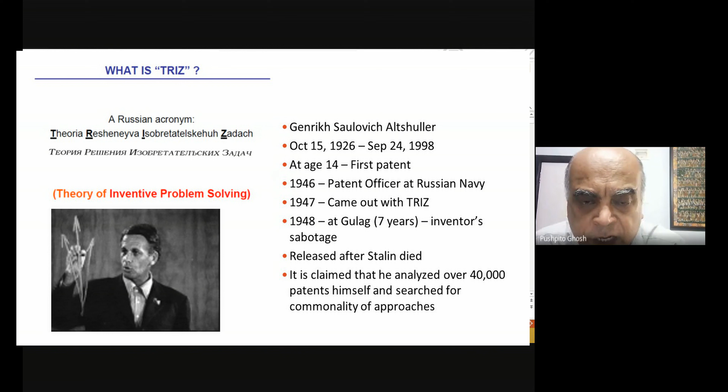I thought let me take a break and tell you a little bit about one of the methodologies which is being looked at as a way of facilitating innovation. This is the person, Genrikh Altshuller, who came up with this method known as the theory of inventive problem solving. He used to work in the Russian Navy as a patent officer. He felt that innovation is something that can be learned, and he came up with a structured methodology, which is what I'll tell you about today.

He apparently studied a very large number of patents, anywhere between 40,000 and 200,000 depending on whom you're referring to. Interestingly, many of these patents that he read, and this whole theory that he developed, came while he was in jail. He was actually put in jail by Stalin, and only after Stalin was no more was he released from prison. Very, very intelligent person.

What he did, of course, was read patents, this large number, and he was trying to find out if there are some recurring themes in how people were trying to solve whatever problem it is in the patent. He said yes, it always falls into some kind of themes, so he picked out those themes. Then he said, if people can be trained to pick out such themes and find out how one might get a suitable solution, that would be wonderful. So that's what it is.

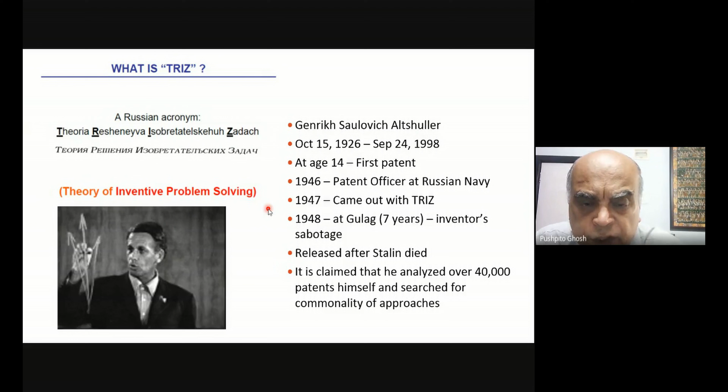So this is his most important principle. One is, as I said, why was he looking at patents? He said whatever you try to do, you'll find someone somewhere has already solved your problem, or one similar to it. What he said is creativity means finding that solution and adapting it to the current problem. Obviously you cannot use that solution exactly in toto, because it may be a different problem, but there's a huge amount one can learn. That's what he means by a problem similar to that.

Then he said, if you can learn and just adapt it to your particular situation, that might be the fastest way to solve the problem rather than thinking all the way from scratch. It may not be necessary. This is something I would encourage all of you to do - there is a lot out there, you just have to be smart enough to pick it up.

And then what he said is that most of these things he found have something to do with contradictions. What he said is, don't accept contradictions, resolve them. Let me tell you that over the years, when I was looking at contradictions in our own work, some of those things actually spurred invention.

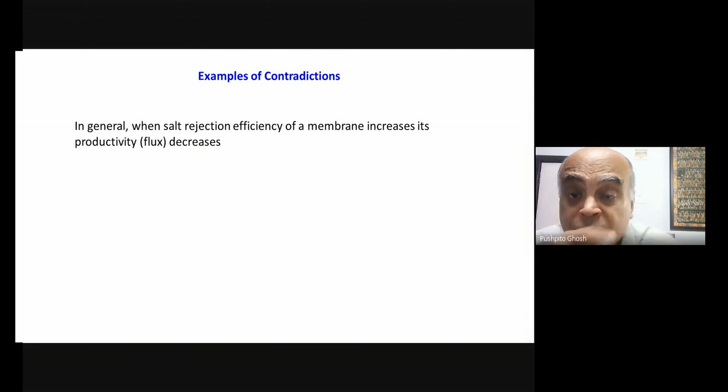Our institute was quite big in the area of reverse osmosis. As I'm doing reverse osmosis, I obviously want to reject as much of the salts as possible so that the water I get is as pure as possible. The second is, for a given pressure, I want to maximize the output in terms of the flux. Generally it was believed that if you try to increase the salt rejection efficiency, it would mean you compromise on the productivity of the flux, which you don't want. You really want the best of both.

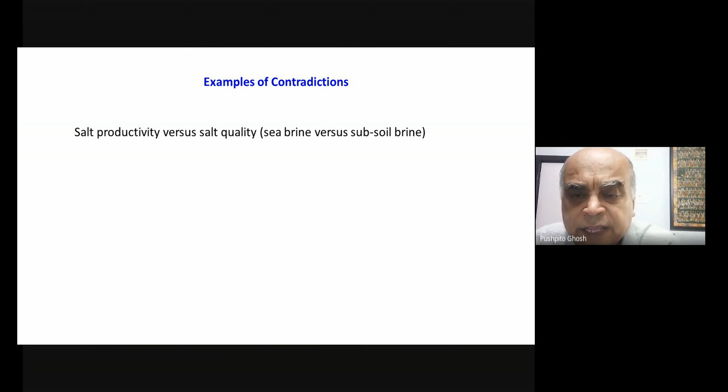Take another case. I remember this used to be a burning issue around 99, 2000. Most salt is produced from seawater, but there were also underground brines in many areas from which you could produce salt with very high productivity, because those brines were much more concentrated than seawater, maybe 3 to 4 times as concentrated in some cases. Obviously people wanted to use those to produce salt, because in less area I can make more salt. But the problem was that it would give higher productivity of salt, but the salt would be of poorer quality.

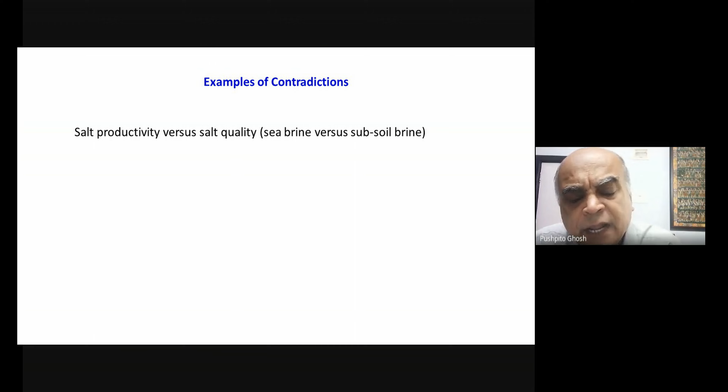The belief was that because the composition of those brines is different from that of seawater, and that is the reason. Okay. Or if someone says, I wanted extremely pure salt, and there is no other way to do it than, let's say, by recrystallization. You can say, let us just use solar energy, dissolve the salt again in seawater, and then allow it to evaporate out in the open pan.

And honestly, you can get extremely pure salt through that kind of recrystallization, but it increases the land requirement. So you may require about 10 to 15% more land. And so that was again a major issue. Where will this land come from? So obviously, how do I resolve this contradiction that I can still make use of solar energy, do recrystallization out in the open in the fields, but at the same time not increase the land area?

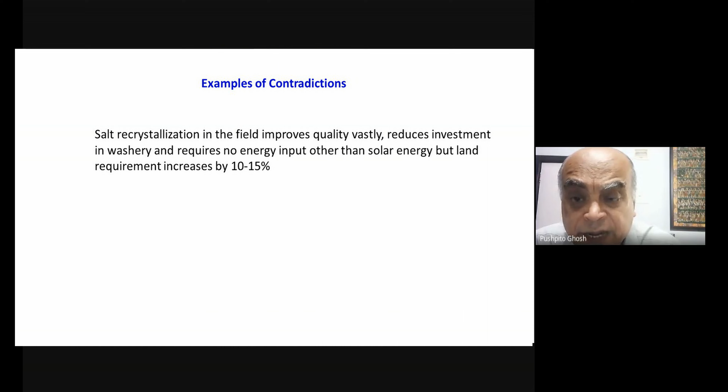Or let's say there is a membrane, the ultrafiltration membranes, which are excellent for rejecting pathogens. So if your water is contaminated, let's say with coliform, you might be able to pass it through these ultrafiltration membranes, and you might be able to make germ-free water. Now, actually, the people who require it the most are, let's say, people in villages, because many times they just pick up water from the ponds. Those waters have got a lot of pathogens in them.

But the problem is that these ultrafiltration units, they require adequate head, because you need some pressure to push the water out of the membranes, because the pores are very small. Now, the problem is that you can, of course, do it with a pump, but these very poor marginal villagers, many times they don't have electricity in their house. They may not, or we may not, be able to afford a pump. Okay, and they all live in just their huts. There's no head, so they can't generate that pressure.

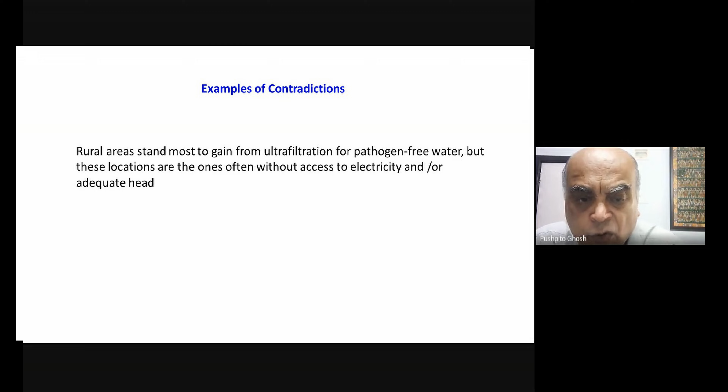So how do you solve this kind of a dilemma, that the people for whom you require this water the most, they are the ones who are least in a position to carry out this kind of a process. So again, a contradiction. This is what innovation is about in many cases. It's about resolving contradictions. People say, yeah, but what will we do?

Subsoil brine and seawater are different composition. But then that does not help us at all. It is like being fatalistic about it. But if you say, who said so? The composition is not the only thing. There's so many other things to look at, and maybe you can resolve a contradiction that way, or you could find a particular domain in which the contradictions are minimal.

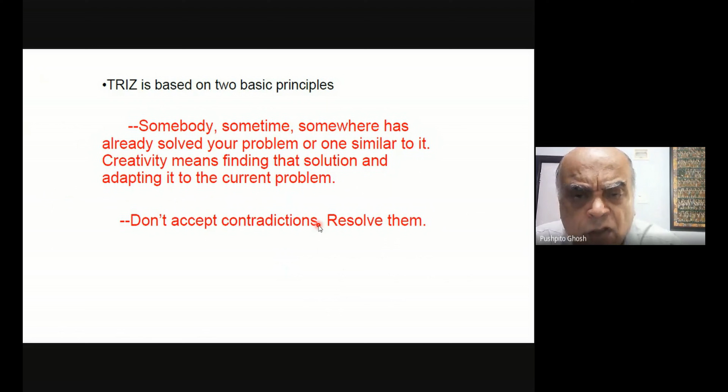That's, for example, what we did when we were able to make a better reverse osmosis membrane, where you could get a good flux as well as a good salt rejection efficiency. And it was all about finding that particular area where really this kind of contradiction was minimal. So that's what he means by resolve them.

So what he said is that, in his view, you can define the majority of problems in terms of certain features. And he was able to broadly define 39 features. Now, also you have to remember that he was a mechanical engineer, so maybe he came at it a bit more from the mechanical engineering end. But I thought, looking at some of this, maybe it is not that it cannot be applied to chemical technology. Maybe it can. It's probably much more general than you imagine.

Because when he was reading those 40,000 patents, or later on even more, it's not as if he was only reading mechanical engineering patents. He was reading all kinds of patents. So I don't think he was so narrow in his perspective.

Okay, but you will find there are interesting features: weight of moving object, weight of stationary object, length of moving object, length of stationary object, area of moving object, area of stationary object, volume, speed of object, force, stress, shape, stability, strength, durability, temperature, illumination intensity. It goes on and on. Loss of energy, power, loss of substance, loss of information, loss of time, quantity of substance, measurement accuracy. It's quite interesting, and it ends with productivity.

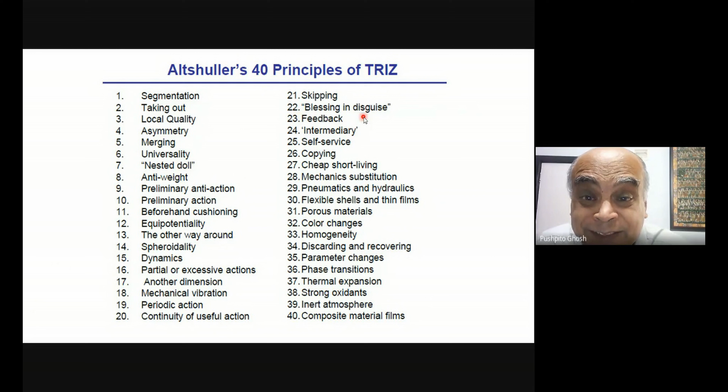Anti-weight, preliminary anti-action, you can see it's quite interesting. Blessing in disguise, self-service, intermediary, copying, porous material. You will be thinking, what is he talking about? But these are the kinds of principles which actually appear in these numbers.

So you have to see, for example, let's say over here it says 28. I'll just say 28, 10, 1, and 39, which is the intersection of volume of moving object and stability of the object, number 30. So that is the intersection 30, giving 28, 10, 1, and 39.

So what it says is go to 28, 10, 1, and 39, then you just put it down. He's saying don't go through all the principles, try to focus on these. Maybe those will help you solve your problem.

And how did he arrive at those numbers? Based on the patents, he felt these were the typical types of approaches people took whenever there was this kind of contradiction, and that's how he came up with these numbers. It's not as if the people who wrote the patents knew anything about TRIZ, but rather TRIZ knew how they had approached and solved the problem.

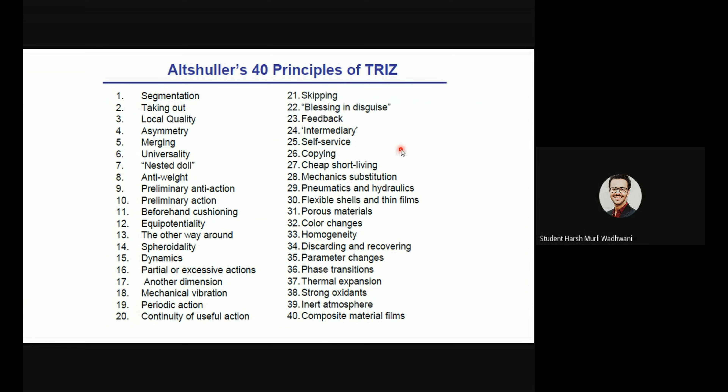When I was trying to look at what were some of the very important problems solved by this methodology, I found a few which have become quite famous. What I was told is that a lot of people use TRIZ and solve their problems, especially in Germany apparently. But many times these are done by industries, and they don't want to share the information.

So a lot of it is actually in the private domain. You can't access it, but apparently Boeing shared how TRIZ was used to solve a very important problem that they were grappling with and not really able to find a solution to. So they called a TRIZ team, did a brainstorming, and came up with an interesting solution which apparently solved the problem. Let me show you.

But look, many times what happens is that you only hear the success stories, but maybe 98 times out of 100 it doesn't work, and nobody tells you that it didn't work. They'll only tell you about where it works. So you have to be a bit careful with these success stories. But nonetheless, I thought it was quite instructive.

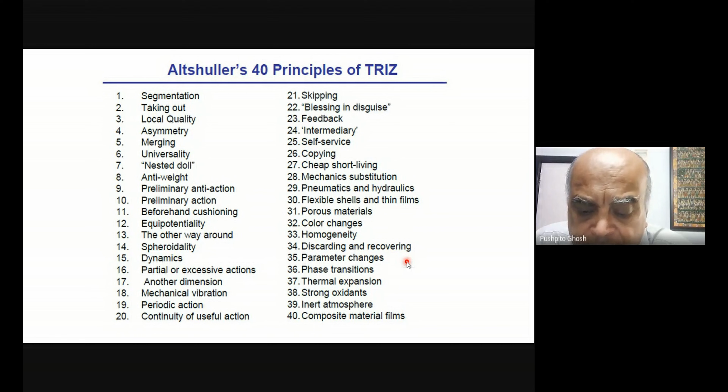But that's not what they were interested in. They were interested in 1, 4, and 7. They didn't want those kinds of solutions. They thought it's not practical. So these were the ones: segmentation, asymmetry, and nested doll.

Now, firstly, remember how Bosch actually segmented the ammonia converter, and put a soft metal lining inside the main thing, and was able to segment the functions of a reactor. He wanted the soft lining to be able to hold the pressure long enough so that the reaction takes place, and then after that the hydrogen is allowed to pass through from that liner, and by the time it attacks the main frame, it's lost all its pressure, since hydrogen was only very potent and dangerous at the higher pressures. That's how they solved the problem, by segmentation.

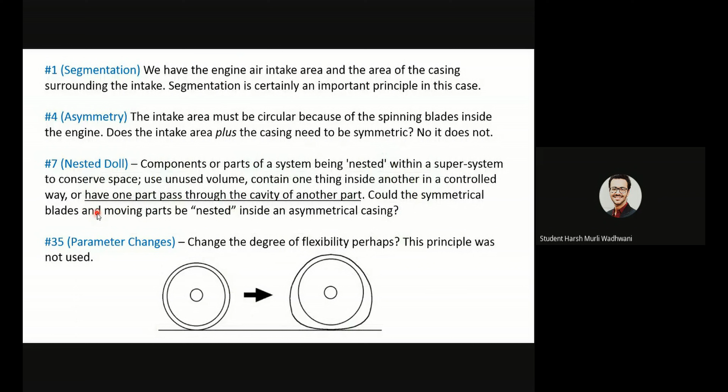Is it clear to everyone? Did you understand? Yes, sir. Sir, but doesn't this affect the aerodynamic ability of the plane?

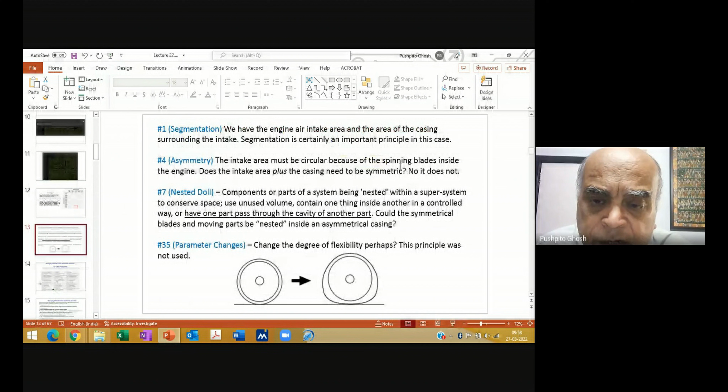This is a very good point. It can only point you in a direction. Obviously, the engineers will after that have to go and look at whether there could be some negative attributes of the suggestion. So I'm sure someone would have gone and done that and found that it doesn't make any difference.

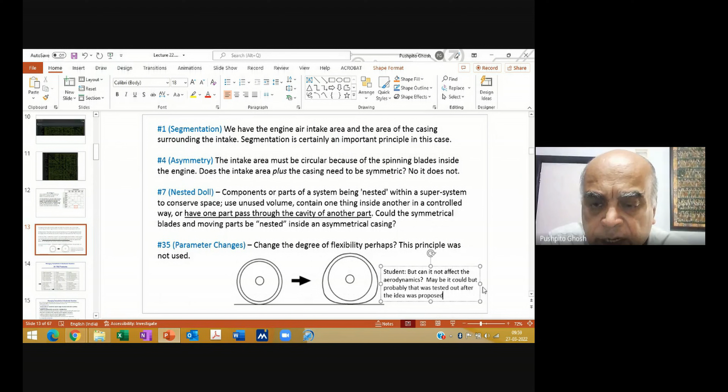But can it not affect the aerodynamics? Yes, sir. Maybe it could, but probably it was first tested out after the idea was proposed and found to be not significant.

Everybody understood the way the problem was solved? Yes, sir.

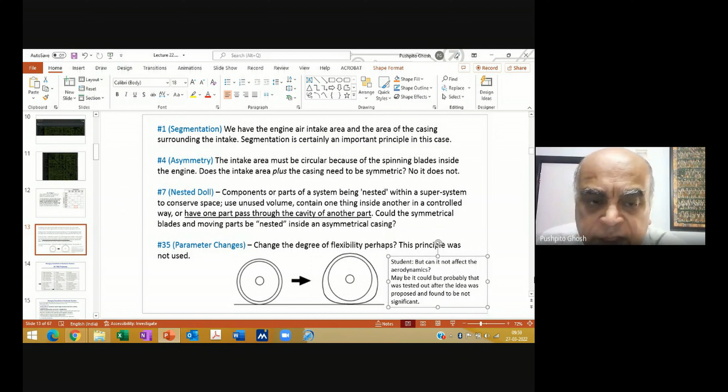Now, all that is fine, but I kept asking myself what is the relevance in chemical technology? Can you really apply it? So I thought, let me take this important contradiction of how you manage the contradiction in an exothermic reaction, because we know that great companies like BASF were able to manage the contradiction.

There's no better example of that than the sulfuric acid process, which is very strongly exothermic, and at the same time you cannot have a low conversion—they achieve something like 99% conversion. So how did BASF manage? Of course, by very innovative thinking. Those are probably the kinds of ideas that Altshuller incorporated.

I don't know whether the work of BASF was included in his thinking, but let us look at it. I've seen, and I'll send you, a few publications on using it in chemical technology. But those people had made their own features and then tried to apply the TRIZ methodology. Somehow I did not find that so interesting.

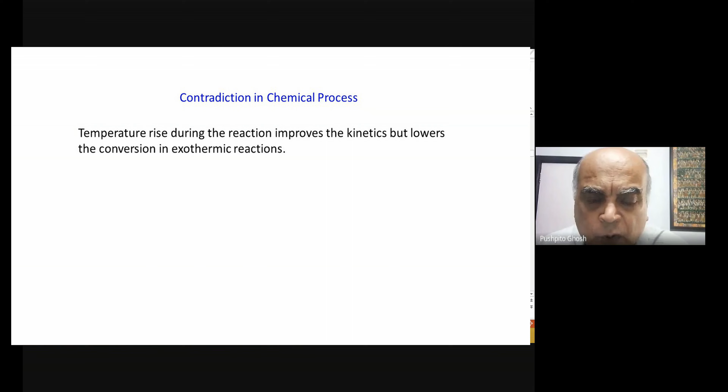I felt that Altshuller has put in a lot of thought, and let us see if using his features we can try and find a solution to this problem of the contradiction in exothermic reactions like the contact process. So what did we say is the contradiction?

When you have an exothermic reaction, there is a buildup of heat. Consequently there's a rise in temperature, and that could speed up the reaction. I felt that the improving feature would be the speed—it's speed of object, but it can be any speed of reaction. I felt that maybe this could be taken as the improving feature, and the worsening feature was really what?

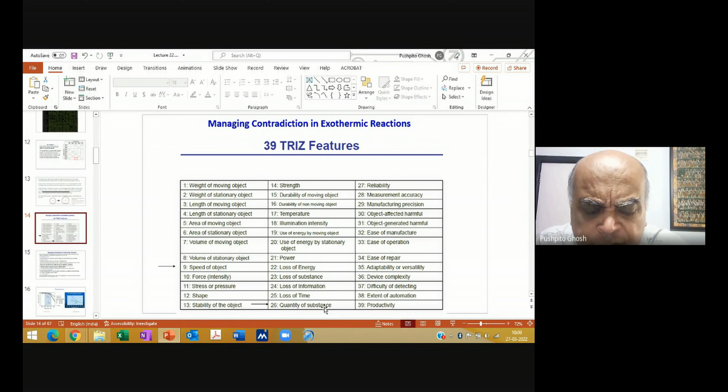It was the quantity of substance. Maybe these two could be the kinds of features that we should focus on. Does anyone have a view on this? Does it seem sensible? These features, do they look all right?

Yes, this is at the heart of it, because if you get that wrong, then you'll be in the wrong box, and then you'll look for the wrong principles. But I'll also show you that I looked at it in more than one way. I'll tell you about that also.

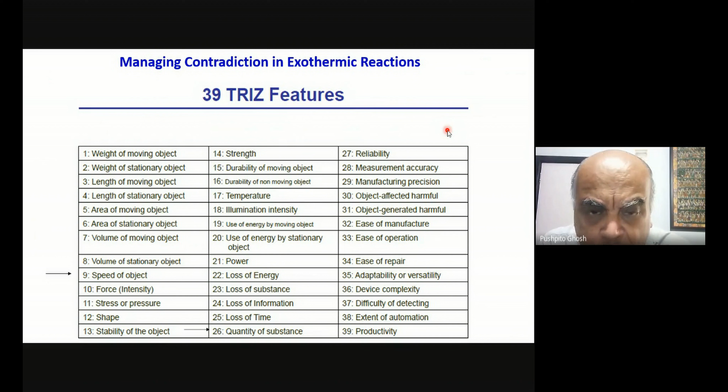So rate of reaction is number 9, the improving feature, and quantity of substance, 26, is the worsening feature. So let us go back to number 9 as the improving feature and 26 as the worsening feature. If you look at that intersection, we're talking about 10, 19, 29, and 38.

When I saw what exactly these mean—I will send you two files, one which gives a little more description of these various principles and what they mean, and also of the features, so you can go through it more carefully. 10 says preliminary action.

Perform before it is needed the required change of an object, either fully or partially. So that is preliminary action. 19 is periodic action.

Periodic action is that when, for example, when we are pushing a nail into the wall, we don't just use the hammer and push on the nail. You hammer the nail, which means that periodically you are applying a force. That's what you are doing.

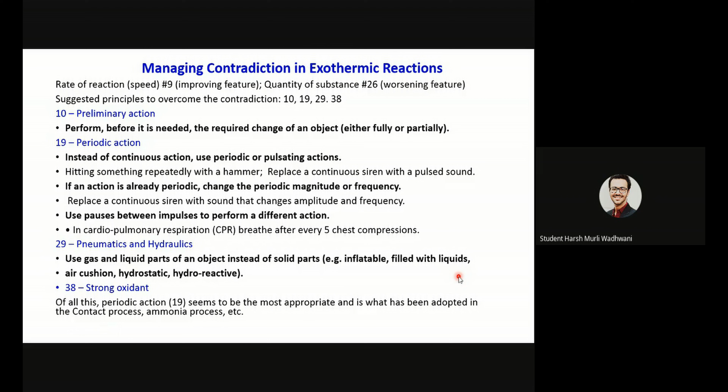Yes sir, after reaching 60% conversion, they are cooling the whole product and then again starting - so that is kind of a periodic action. Brilliant, yeah you can see - I just applied it to this.

Suppose, let's say I was not as smart as BASF, and surely we aren't, but you may have gotten some kind of guidance on how you might try to go about solving the problem. It's not to say that's the only thing that will help you, but I found it really remarkable that actually what is being done is periodic action. Is that clear to everyone?

Yes sir, everybody understood? But let me tell you I was not absolutely comfortable with the selection of the features, and I asked myself, have I been over optimistic in selecting those?

Instead of speed of reaction, I can also look at it as: if I had done the reaction under the isothermal reversible type of condition, there would be a loss of time, and I don't want that - I want to do it faster. So the improving feature I might be looking for is loss of time, meaning there is less loss of time. I don't want to lose so much time.

And the worsening feature is, of course, the quantity of substance. So I said maybe loss of time is also not a bad way to look at the feature rather than speed, and there is a relationship between the two.

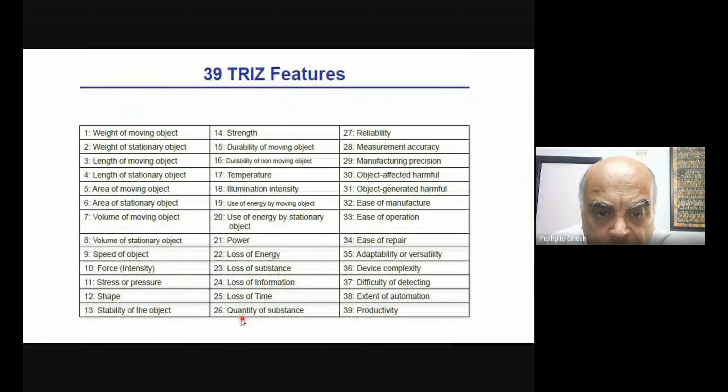They're not completely mutually exclusive. So when I looked at the loss of time and worsening feature, and quantity of substance - loss of time is 25, quantity of substance is 26. So we can look at the intersection of 25 and 26. That gives you 35, 38, 18, 16. That's what I wrote: 35, 38, 18, 16.

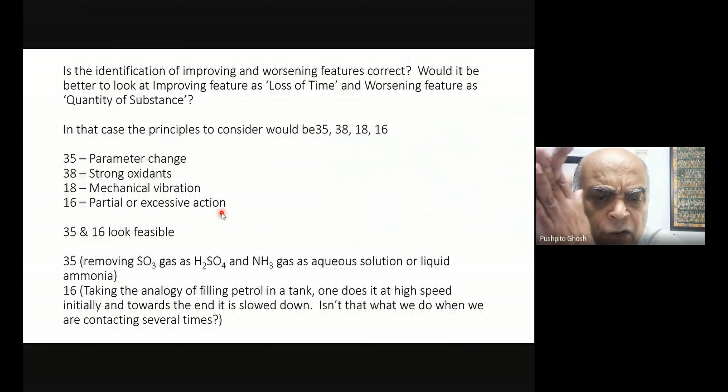Now, when I was looking at this, it doesn't give me periodic action. It gives another four: parameter change, strong oxidants - some of these things you'll find are sometimes common - mechanical vibration, partial or excessive action. Now, I just felt that partial or excessive action is a possibility.

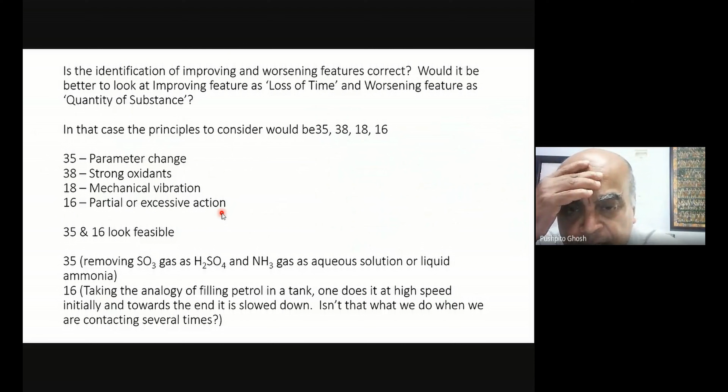Let me explain what is meant by partial or excessive action. For example, if you're filling up your car at a petrol pump, the attendant inserts the nozzle into your tank. Initially the petrol fills up very fast, and towards the end, when the tank starts getting full, it slows down just so it's not spilling over. If you look at it, that's not very different from periodic action - you let the first part happen very fast, and only towards the end you slow it down. So this partial or excessive action is actually a good way of doing it.

That's exactly what you're doing - very fast initially, slowing down as you move more towards 100% conversion. But here, I'm doing it very, very fast.

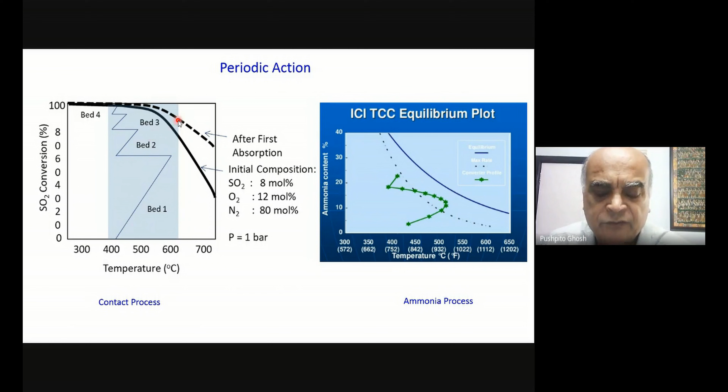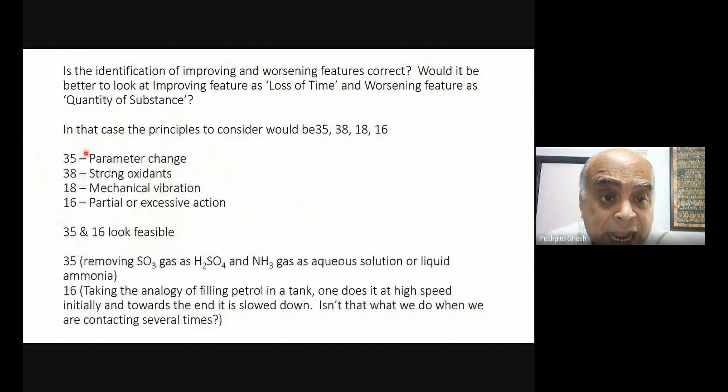And parameter change, which wasn't there in the other one - that could be where, after the reaction has taken place, I'm taking out the SO3 and ammonia, and I've got a new set of conditions with the product having been taken out. So to that extent, parameter change is perhaps also indicated.

But certainly in terms of the most innovative approach, I think partial or excessive action seems to be a good approach. Even if you don't take exactly the same features - but of course the features have to make sense - you can actually come up with a fairly interesting solution.

Is this sulfuric acid thing clear? Any suggestions or alternative thoughts from anyone?

Sir, is there a way to implement the 38 principle, like the strong oxidant thing? Can we incorporate that also?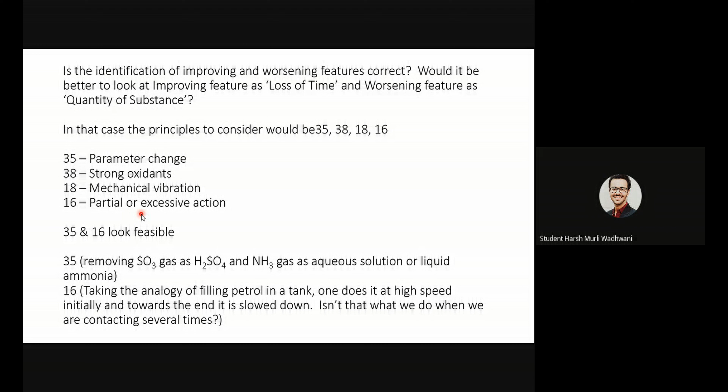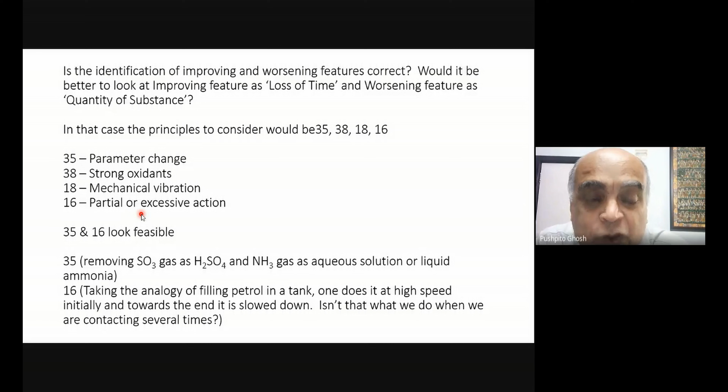Yeah, that's very interesting. Obviously not in the case of ammonia synthesis, because that's a reducing reaction. But if I were to look at sulfuric acid, instead of using oxygen, I could have used something else to oxidize SO2 to SO3 - I could have used chlorine. Then, of course, it would be a completely different method of carrying out the reaction. Obviously you don't want to make such drastic changes, because industry may not be interested in that. Industry may be interested within certain boundaries, if I can improve things.

Is that clear? Yes, sir. Did the methodology make sense to you, or at least did you understand the approach? Yes, sir.

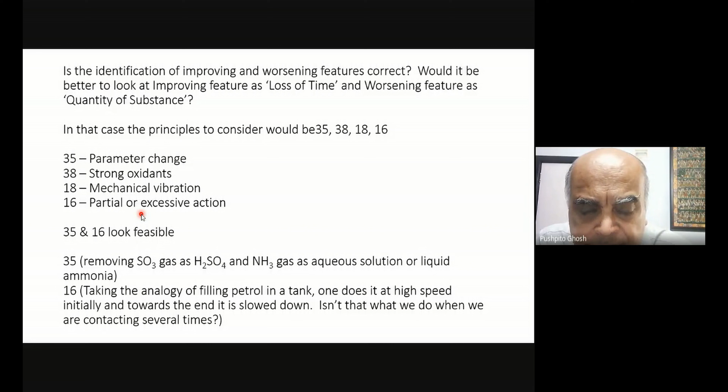Okay, great. There were two more things that TRIZ says. Let me also tell you that there are also some algorithms - I think it's called ARIZ, which is a computer program, so you can actually play with that. And there's another thing called SUF, which very high-end practitioners of TRIZ might use to try and solve problems. I didn't want to go into all those complex things.

But the other two principles I found very interesting - one was that wherever practicable, look for solutions from within. It's quite amazing how you can come up with extremely innovative solutions. I found that in many of our work, we didn't call it solution from within, but that's exactly what we did. So I'll take you through a few examples.

But before that, let me show you, again from the contact process, a great example of solution from within. These are the beds - this is your periodic action done on your catalyst beds. First you take molten sulfur and push in air, and it forms SO2, then you put it through your beds where SO2 is getting converted to SO3.

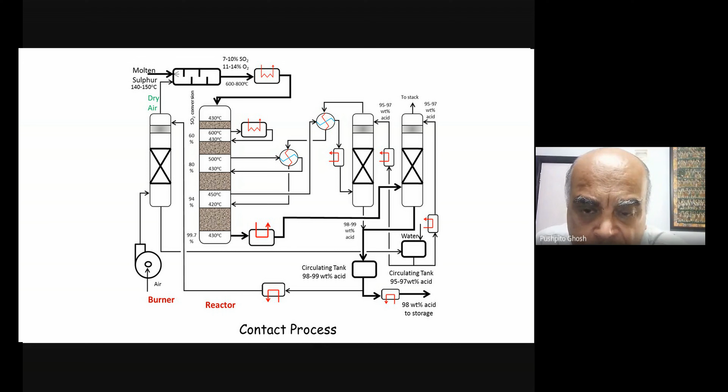You see, concentrated sulfuric acid itself is one of the best drying agents. Very few things are as potent as concentrated sulfuric acid. So what they did was the concentrated sulfuric acid produced from the contact process, they put it into this initial vessel. Concentrated sulfuric acid is falling down and your air is traveling up, so there's a counter current, okay? The concentrated sulfuric acid is used to dry the air. It's a wonderful solution from within. I don't need any other reagent, chemical, nothing from outside.

Where people teach about vanadium pentoxide, all that is fine, but there are so many other cleverness in these processes which really comes from searching for a solution from within. Look at the other beauty of it: sulfuric acid, when it picks up moisture from air, obviously gets a bit diluted, and it is that slightly diluted sulfuric acid which is put along with some more water, making it about 95% sulfuric acid, and that is pumped into these absorbing vessels. The SO3 coming from all of this reacts with this 95 to 97% sulfuric acid and gets converted into oleum. So it's not as if you put SO3 into water, you put it into 95 to 97% sulfuric acid. Even the moisture in the air was taken advantage of. It's a really superb process, and clearly a solution from within.

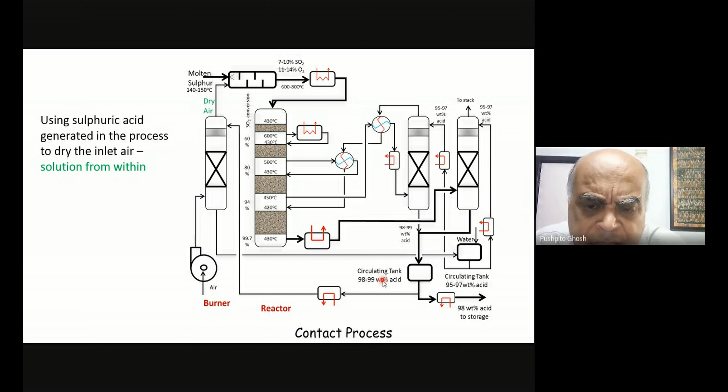Even if I didn't know the name, later on I can always say, yes, this was that. Around 2003, we tied up with Mercedes-Benz, the Daimler corporation in Germany. It was probably one of the most visionary projects that India has ever done, where our aim was to make oil from wastelands, and Mercedes were very, very interested in the work.

Previous to that, we had actually made small amounts, maybe a few liters of biodiesel from the Jatropha plant. If you have heard of Jatropha biodiesel, let me tell you, it is this work which actually made it so famous globally. So they looked at our biodiesel and said, hey, it's not bad, but it required some areas of improvement. We were able to improve it, and finally they felt we had been able to make a very good quality biodiesel. I myself was shocked, they sent this, I see this article, Mercedes to run on pure biodiesel.

Now let me tell you the significance: this was the first time ever in the world that neat biodiesel, not a blend of biodiesel with fossil diesel, but neat 100% biodiesel, was actually being tried out. It's visionary companies like Mercedes that can do it, you don't expect everybody to take such initiative, and we were extremely fortunate that they had tied up with us.

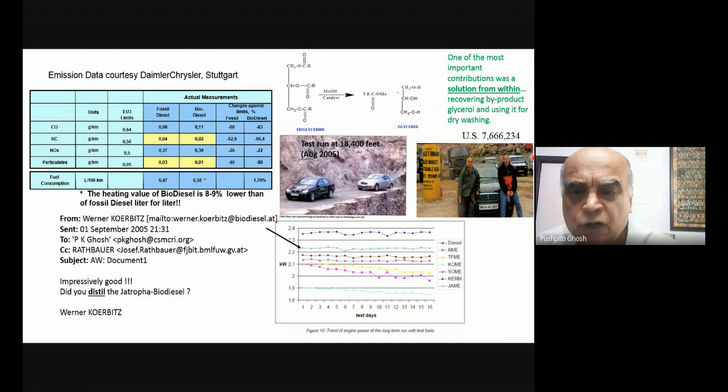I remember he told me, Dr. Ghosh, nobody has made it. He didn't know what we did. We just found a solution from within. And that's what got patented the world over. Is that clear? Did all of you understand?

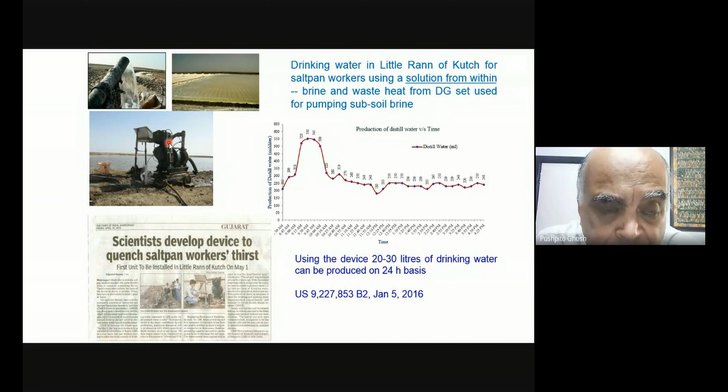There are copper tubes, and the hot flue gas from the engine is passing through that copper tube. On the outside, the brine is falling on those tubes. So the brine gets heated up to beyond 100 degrees centigrade, and it generates steam. Then we were just condensing that steam and getting the water. Is that clear? Yes, yes.

That's the distillation process. Now let me show you another example of a solution from within. This patent has been granted to ICT just last year, and the international patent has also been cleared. This approach has many dimensions.

Now, in coastal areas, like the coast of Gujarat, all the major producers of soda ash and chloralkali are located along the coast. Why? Because their raw material is sodium chloride, which is converted into soda ash by the Solvay process, or by electrolysis into caustic soda and chlorine by the chloralkali process. That's why all the soda ash plants are set up there.

But the problem, which you might have learnt in your courses, is that salt has to be dissolved in very pure water to practice the Solvay process. You cannot dissolve salt in seawater and use that for soda ash manufacture, because ammonia is used in the process. Ammonia gets recycled, but it can react with impurities in seawater like magnesium and calcium, forming magnesium hydroxide. So you cannot do that, you need very pure water to dissolve your salt.

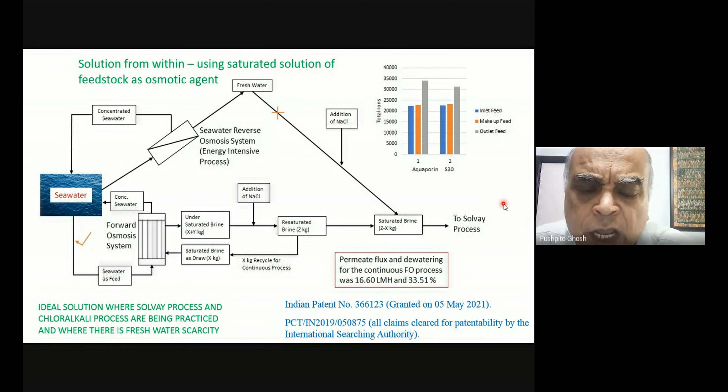How is the pure water normally obtained? Many of these plants have large RO units for seawater desalination. They generate fresh water, then add sodium chloride to it to get saturated brine, which is used for the Solvay process or the chloralkali process. This was always troubling me, because reverse osmosis takes a fair amount of energy, it's a non-spontaneous process. The osmotic pressure of seawater is 26 bar, and these RO plants typically have to apply something like 70 bar pressure, a high pressure process requiring high capital cost and very high energy requirement.

Believe it or not, this idea was generated in our ICT canteen. I was eating lunch with some people, we were discussing something, and suddenly this idea came to my mind. What they need is saturated brine, which has an osmotic pressure of around 300 bar, while the osmotic pressure of seawater is around 25 to 26 bar.

So we were working in the area of forward osmosis, the conventional osmosis, where you have a membrane, and water flows from the region of low osmotic pressure to the region of high osmotic pressure. That's what Van 't Hoff developed in his osmosis equation, pi equals CRT. What we are doing is not RO, we are passing seawater through this module of hollow fibers, from the inside tubes, and from the outside shell side we pass the saturated brine.

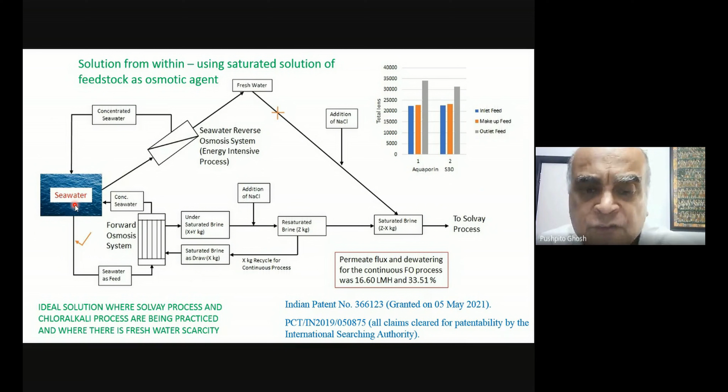And with something like a 25% increase in salinity, what you can also do is draw in some seawater to dilute the concentrate prior to discharge. Okay? Yes, sir. Thank you.

There is another thing which TRIZ says, which is extremely interesting. What it says is to use defect as a resource. Let us try and understand what is defect. You may have already seen, some of you, this particular illustration, which I will show you now, of what is meant by the most ideal solution. Have any of you seen this figure before?

Anyone? Of soap being filled into soap boxes. Has anyone seen this? No, I suppose really, no one, right? No, sir. Okay, good. That makes it even better.

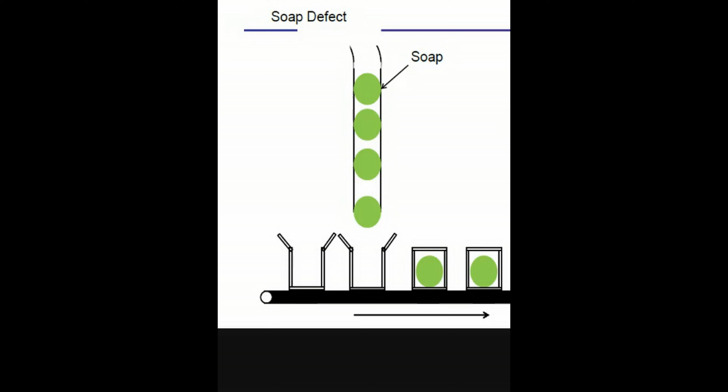So this is talking about a very interesting problem. Imagine when you go to a factory producing soap, and there are thousands and thousands of soap cakes being packed into boxes every hour. So you have very high speed lines. These are empty boxes, and this is your soap falling into the box.

Can you imagine what a perfect alignment is required for the soap to fall into the empty box? Once it falls into the box, you just put on the lid, and that's it. That's being sold in the market.

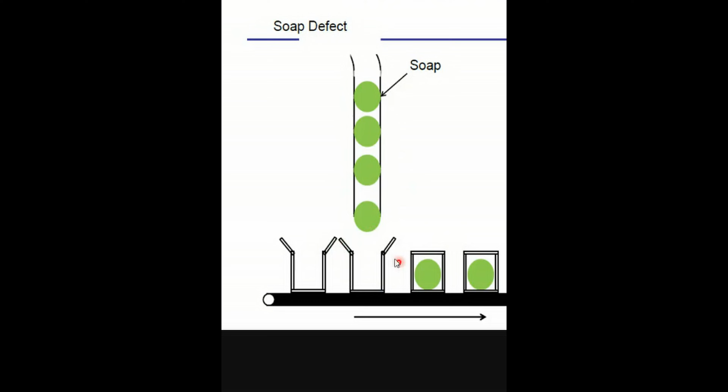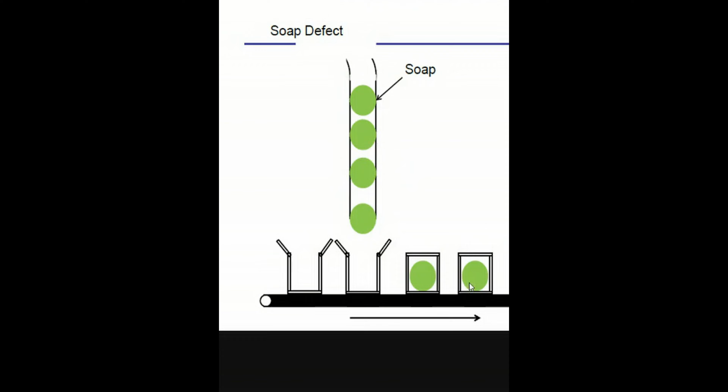But every so often, what happens is that an empty box misses the soap, so it comes out with no soap in it. It's not surprising, since it's such a high speed operation. So obviously you cannot sell empty boxes of soap. You need to make sure those empty boxes are removed before packing into the cartons and selling the filled boxes.

What would be the best solution, or what would you do? So maybe later on in the line, we can have a sensor that detects empty soap boxes, depending on the weight of the filled soap boxes. Filled boxes will have a certain weight requirement, and anything below that is knocked out by the sensor. Something on that sort.

Right, but you can imagine the speed with which these boxes are moving. Any measurement always requires a certain finite amount of time, so it will have to make the measurement very fast, accurately or not. So there is a problem. And then, okay, I make the measurement. And then after that, what will you do? You'll just remove those boxes, right?

Yes, sir, I have a better option. We can, further in the line, put an air jet kind of thing that will blow some air. So if the box is empty, it will fly out, and if it is a filled one, it won't fly out. Oh my God, you're a genius.

That's wonderful, that is the solution which was proposed. So what you have is, just like you said, a strong draft of wind. You could have fans, and so the empty boxes will topple over. What have we done? We have used the defect itself as the solution.

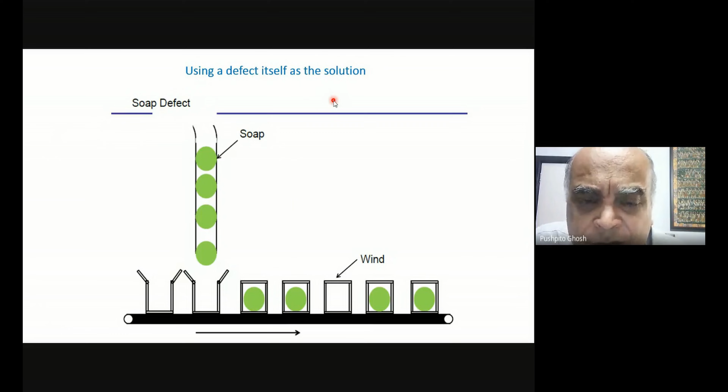Just try to recollect when we talked about the lithium-ion battery, and the work that Yoshino did, where he put in a separator - a porous polyethylene film - separating the anode and cathode compartments. What he was trying to do was that in case there's any unexpected heating up or short circuiting that heats up the lithium-ion battery, the heat fuses all the pores, and it becomes an impermeable film. So it cuts off the anode compartment from the cathode compartment, becoming like an internal fuse.

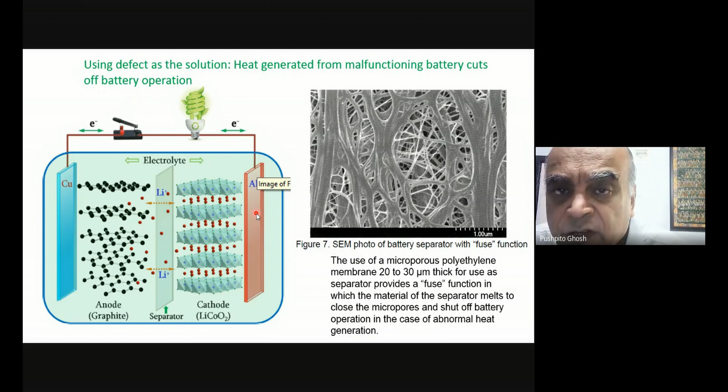So what did I do? I used the defect - the heat and the consequent rise in temperature - as my solution to the problem. And that, by the way, is also the principle of operating any fuse: you take a low melting alloy which cuts off the circuit. So it's not as uncommon as we think it is.

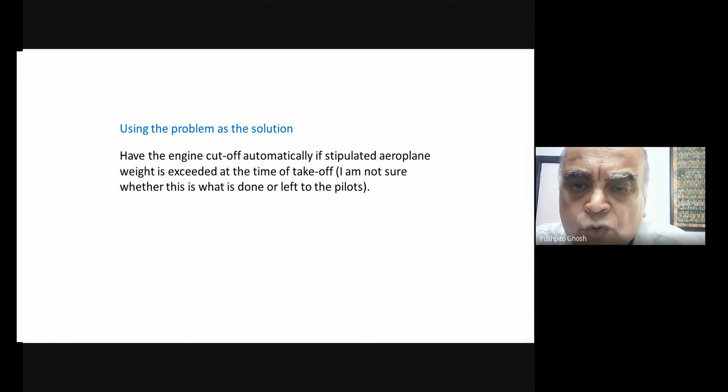You can look at this kind of approach in so many areas. Take an aeroplane, for example - obviously if it's overweight, with too many passengers or too much luggage, it's unsafe to fly. Today, the moment pilots detect it, they offload some luggage or passengers. But if there was a way to automatically measure the weight of the plane just before takeoff, and that sensor gave feedback to the engine, the engine simply wouldn't start if the plane is overweight. In other words, I'm using the problem itself as the solution.